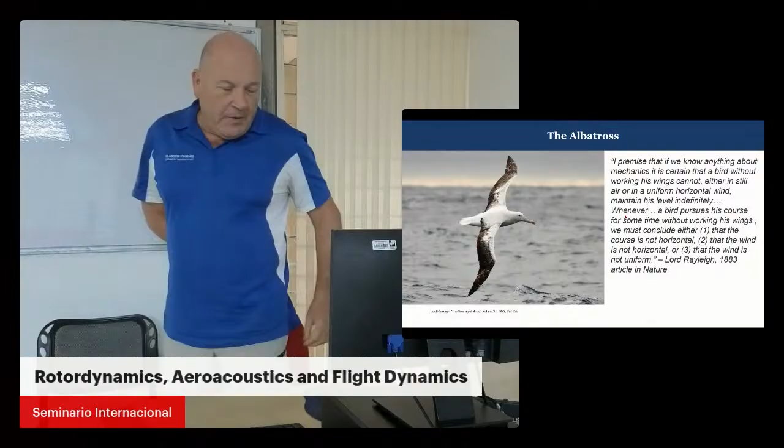Today is remote lectures. Now these will be repeating some of the stuff we talked about before, but going into some detail. I should say from the beginning that some projects faculty do, where they're very deeply involved, like very scientific, very physical, all kinds of things, usually those are the ones where we get grants, funding for those projects.

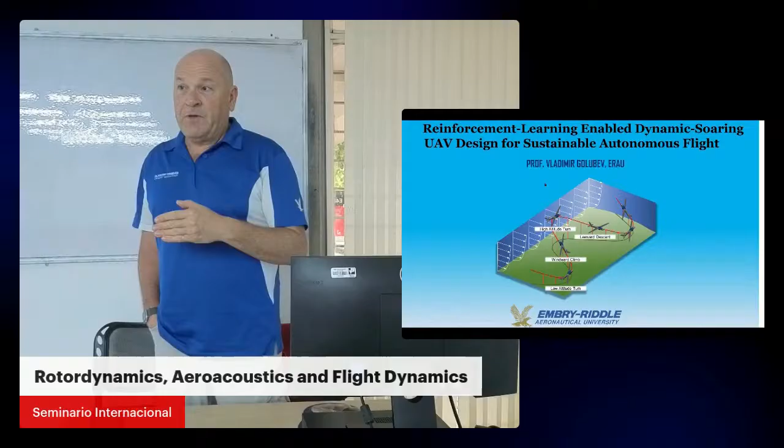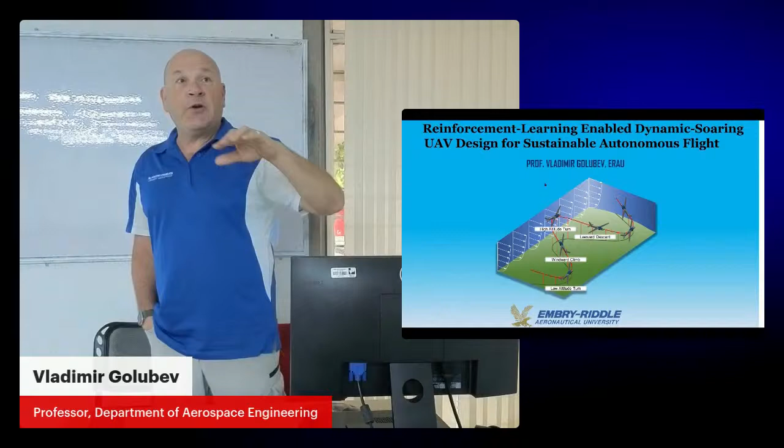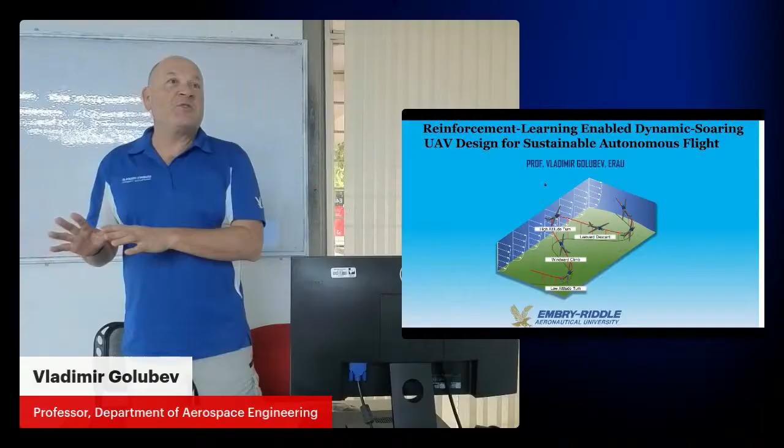And there are projects where we actually supervise student teams. So this project is actually where we have generations of student teams, so I don't know much details on every single thing. I'm just going to go through the background of this information because, as my understanding is from Dr. Guillermo, that's one of those projects where we can have some good collaboration. It's interesting because there were layers and layers. There were some master students who defended, but master students were supervising undergraduate teams, and we were getting return on grants for this, etc. So there was a lot of action for these projects, but they were doing it themselves.

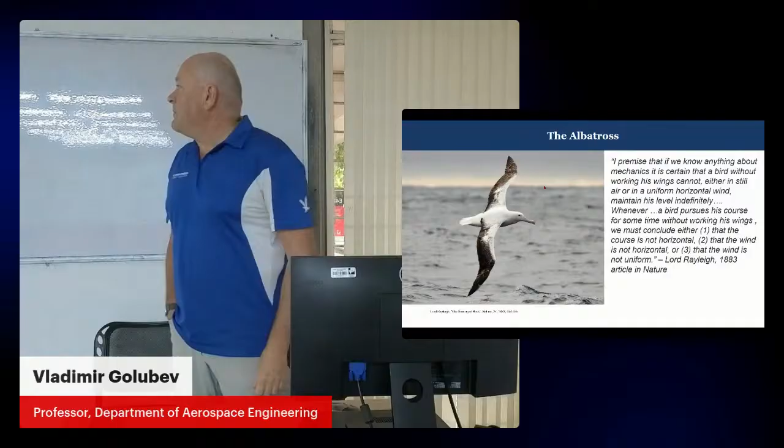Yesterday I talked about the albatross bird as the natural example of how we can fly without consuming much energy from food or anything else, because they do the maneuver where they can extract energy from the wind, from shear in the wind. And that's the case we're trying to replicate. But for this, you need to teach the aircraft how to fly properly and learn things. And that's where this artificial intelligence, in terms of machine learning, in terms of reinforcement learning, comes together.

Now, this is a citation from Lord Rayleigh, which I mentioned yesterday, from 1883, where he mentions the only way this bird can actually fly is probably in the course -- they can have the course if they're not flapping the wings, it's going to be the course is not horizontal, so they go down. The wind is not horizontal, the wind is not uniform, and that actually was the case. Of course it's not uniform, but he was making this clear.

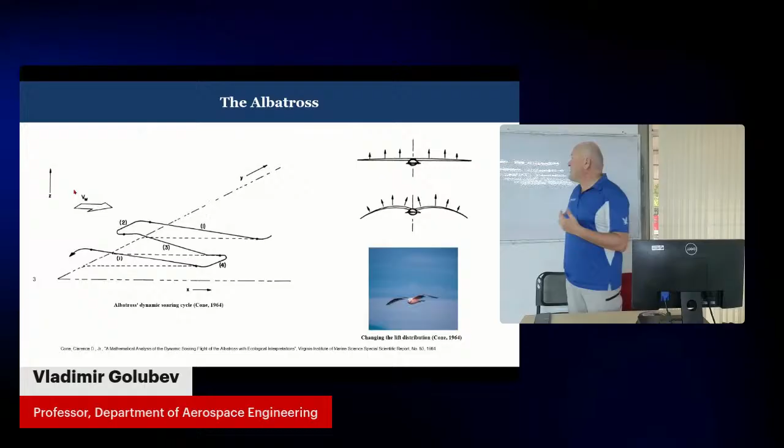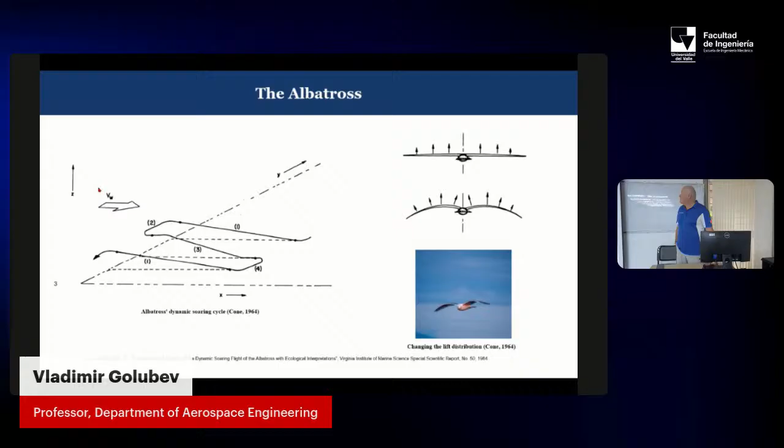Then there were papers later, much later, like 80 to 100 years later. In 1964, Clarence Cone, in his paper, came up with a more strict analysis of this whole process. He was talking about what happens with a bird when it flies, talking about the camber, which produces a dihedral, a variable dihedral thing which has to be there. And at the same time, he was talking about the trajectory -- how they fly to the wind and with the wind. That's what we call dynamic soaring flight, and that was actually when the science of this whole flight started to develop.

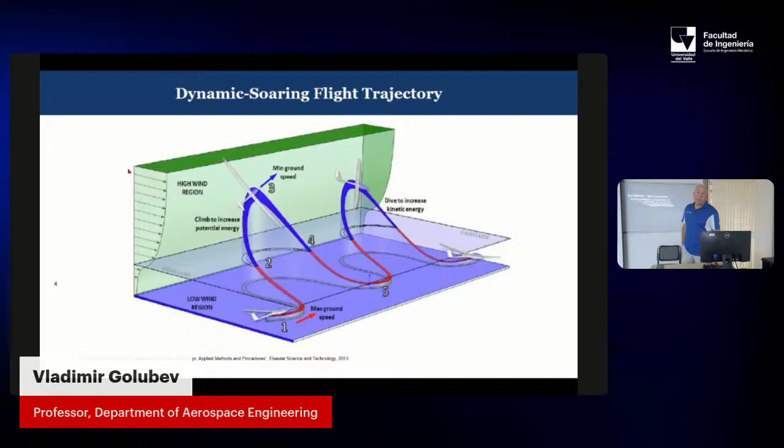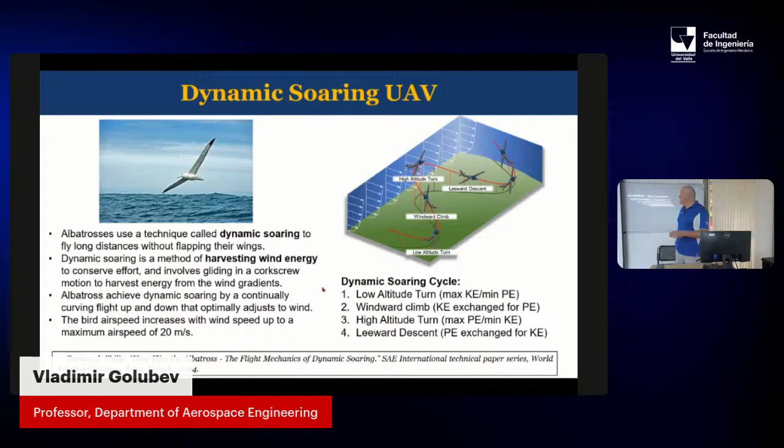And the project goal was, in this case, trying to teach the aircraft to do these kinds of things, so that it would be an autopilot, which will automatically adjust the flight responding to the wind conditions and everything. That was the idea.

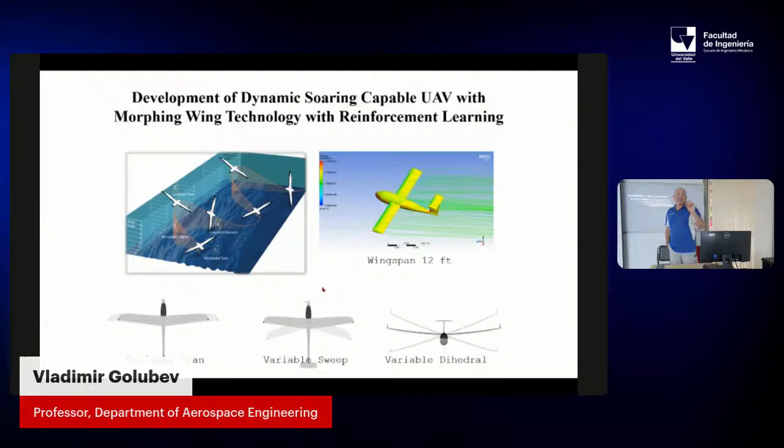But on top of that, there was an idea -- we were very enthusiastic about this project, and I wanted to have something new, so I was actually doing the variable span, variable sweep, variable dihedral for the flights. And the students took this task, but as I mentioned, everything here was done by master students, and there was no PhD involved, which would have been nice to have. And for a master student, they had one year, so they started, then 'okay, I have to graduate already, sorry, I cannot do this,' so that it gets split up bit by bit. So that was the history of this project.

And then, of course, they also provide student, like undergraduate teams. Well, the undergraduate teams actually, it's another thing -- they have the same experience probably because they really have to find time, since they take like 6 courses each semester, 18 hours sometimes. You barely find any time for any kind of research. And they meet -- some people come, some people don't, so that's a mess. Yeah, I mean that's not how business works, right? But that's what it is.

Anyway, so the first generation of student teams, that was Wes and Joseph. My former intern actually came from India, and then he applied to become a bachelor's degree student and work with me.

Well, a very bright student. In fact, right now he's at Boeing, became like a really famous guy there because he proposed some ideas how to use AI to measure velocity of the aircraft, not by pitot tube, but by sound.

You can actually hear the sound and determine what speed you are flying. In fact, you can do it in your car. That's how he actually started—he was putting the microphone next to the car when he was driving, and depending on the sound of the flow around, he could determine the speed.

So he proposed this idea to Boeing, and they were just wow. He got some award or something. He was almost nominated for best engineer by AIAA because that is a bright idea.

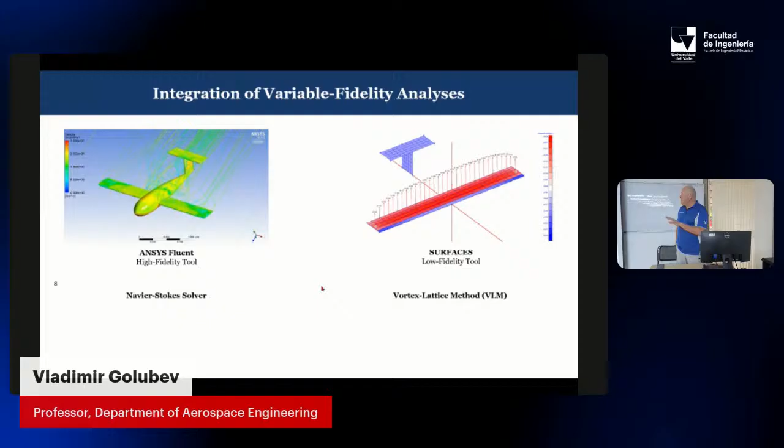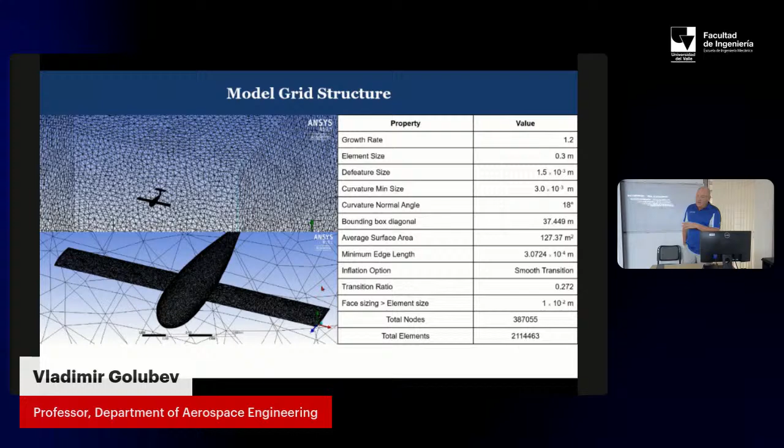So this is his conditions for the grid, which he was setting up. This is the aircraft, how it looks, the one he was developing for dynamic soaring. He was putting this into a SURFACES model with panels, setting all the conditions there. There are high and low fidelity models, and he was comparing them.

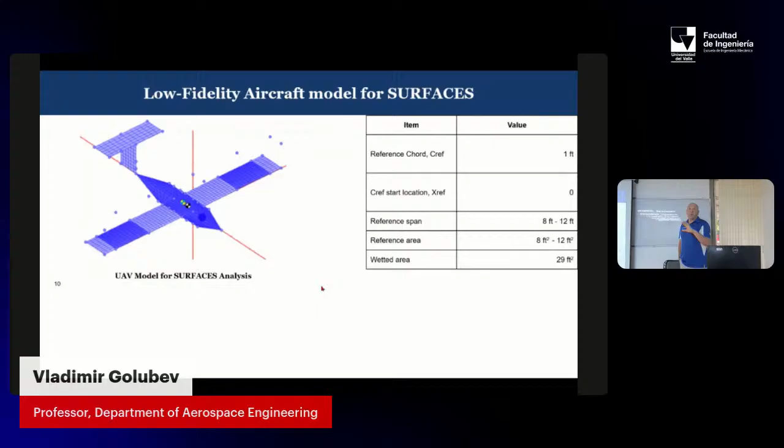Again, the low fidelity model works fine at low angle of attack, but at high angle of attack the low fidelity models don't work—you have to go to RANS, something like that. The predictions show the lift and moment coefficients. This shows how he established this whole thing.

Later, Jacob Adams, my other student, continued on the same line. At this stage, you can see all these coefficients, like CL versus alpha, like CM—this is just an example.

He also experimented with different turbulence models, which is important because you need to understand which one you can trust. There's some experimental results obtained from studies published by NASA—experimental 2D data, experimental 3D data—and then different models like Spalart-Allmaras, DES, and so on. He put all this together and compared which model was best, and that was the one he used later for the system.

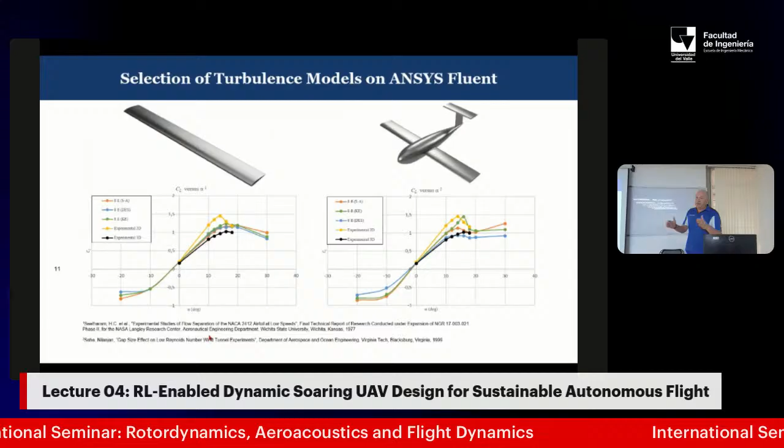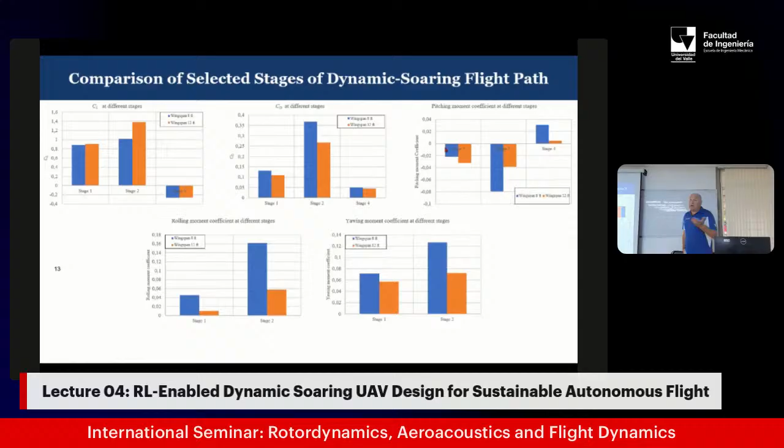That's what the experts do, but they do it differently. They do kind of contract the wings in some particular cases when they maneuver, so they do employ this thing. Everything comes from nature - that's another thing which we can implement.

So these are examples at 8 and 12 feet, flow separation on stage 2, for instance, one of the stages of flight. He was experimenting with which one. You see the wingspan at 12, for instance, shows much better scale compared to wingspan 8, because this one shows a lot of separation.

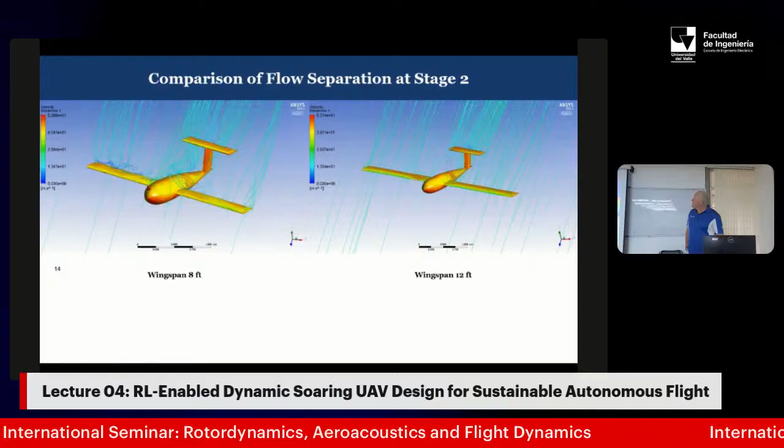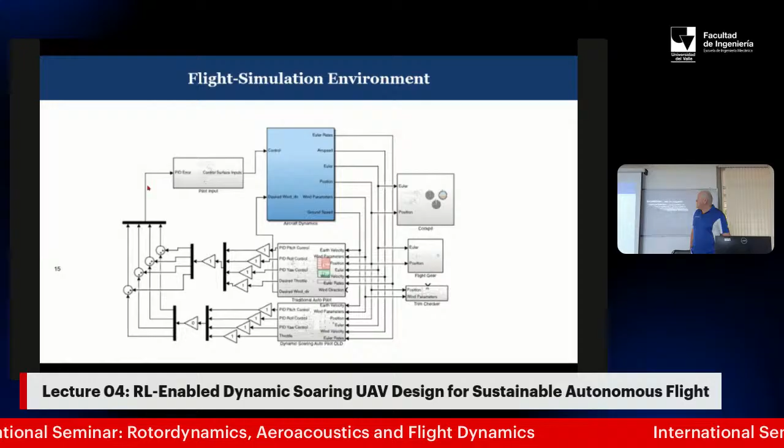Because of the stages of flight, from there he started to develop this whole environment. This environment involves a lot of elements which come together in a flight simulator - you probably use a lot like MATLAB Simulink. So that's actually part of the MATLAB Simulink stuff, putting all together with the autopilot controls.

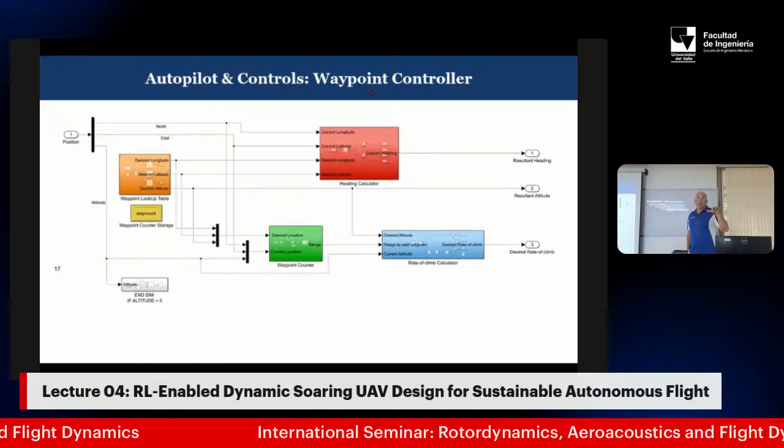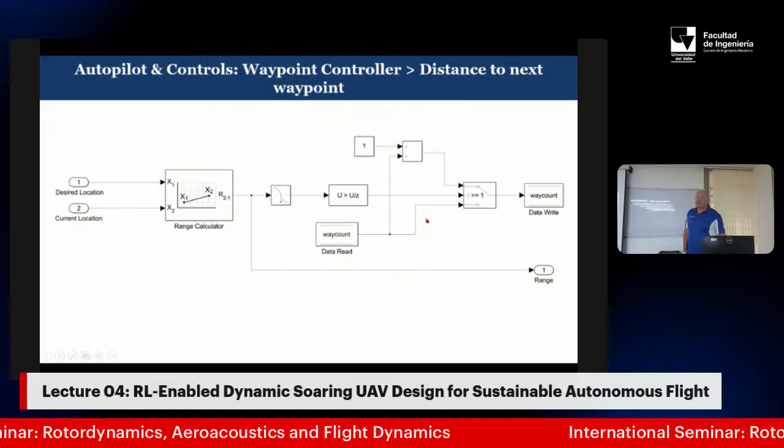You can see here with the waypoint control, you need to go to the position where you fly, and with that condition you actually have to try to reach it. So there's waypoint directions embedded into this system, and then you calculate the distance for the next waypoint - that's how you get location, current location, range calculator - all the elements come together inside this system.

And then you employ the wind model, which is synthesized but coming from the standard model for the atmosphere - I think it's the MIL-F-8785C standard model for wind shear. They had that, and that's what we use.

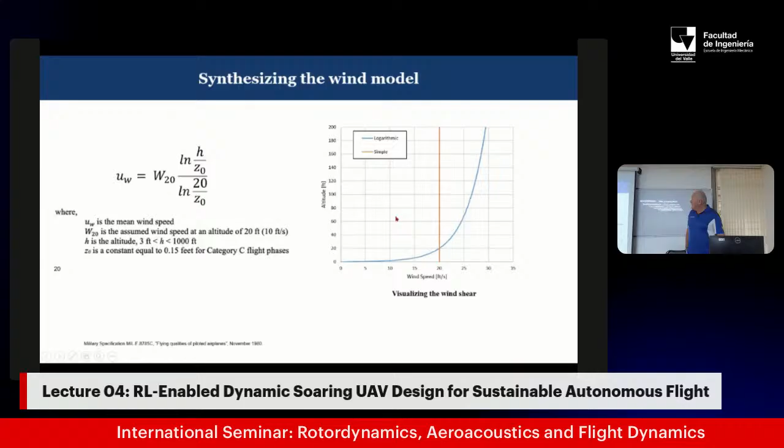This is actually one we see there - mean wind velocity at some altitudes and so on. So basically you use this kind of profile which you can put together, and then the autopilot controls and the control loops involved, like deviations, errors and corrections.

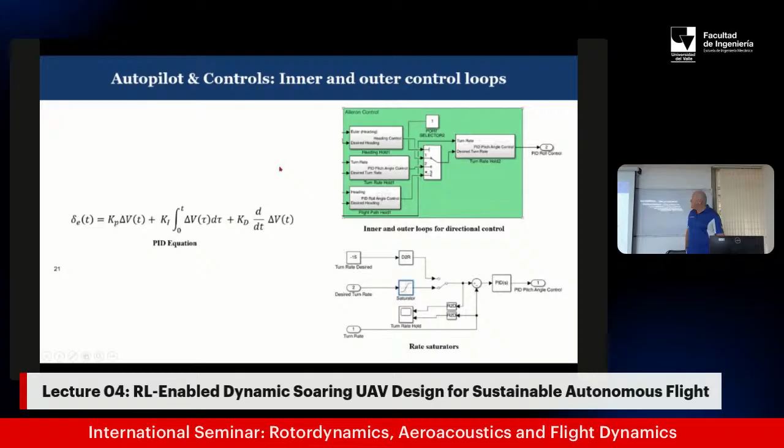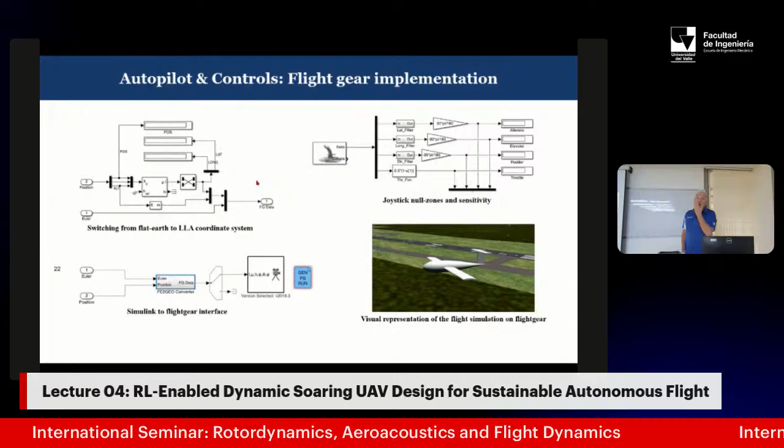As I mentioned before, there's actually an advantage we have in that we have a lot of design courses, so students are really, really good at putting everything together. Simulating is basically their second nature - they all know it. You probably use it as well, but they have a lot of stuff for which I don't know much, which is fun too.

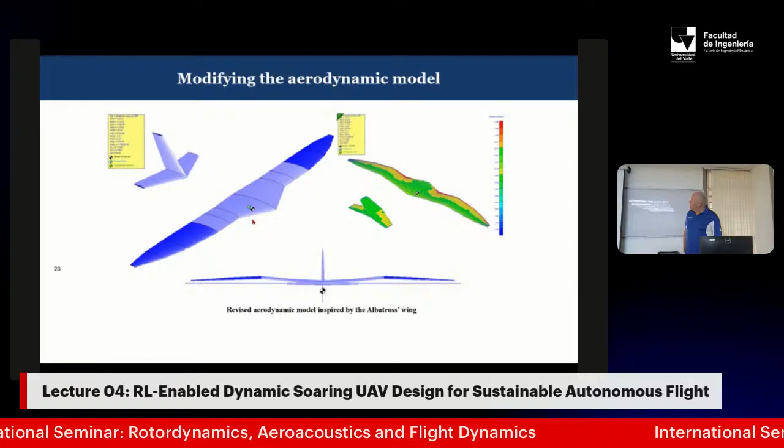But anyway, we found out that he was doing some modifications - see how that kind of wing becomes more bird-like, not just straight, there's some variables that we do.

And then he was flying this thing and seeing how it evolved with the different speed variants for 30 feet per second at different wind speeds, and seeing how it behaves. So there's actually manual pilot involved, and eventually he was looking at the total energy - how much he consumed, how much he can sustain.

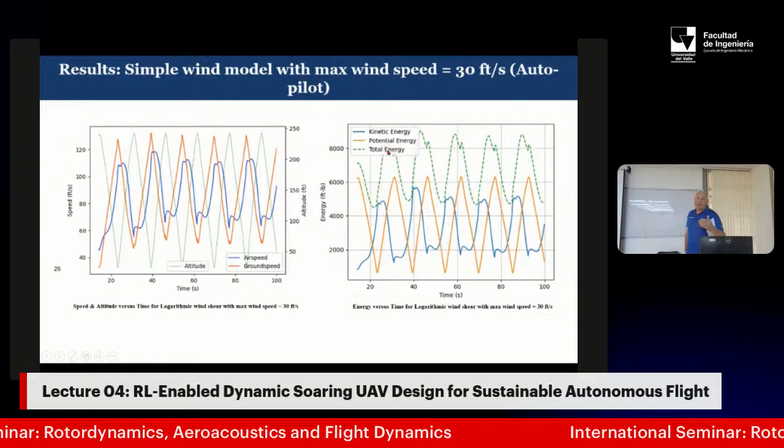Pretty much everything that Jacob Plater did in the automated system, with reinforcement - but he was basically doing this all by himself with the manual pilot.

First we started with soaring, so it was implemented - all this thing, see all these things here. It's a human piloted dynamic soaring.

That's the point - the legacy of all this work went later to Jack, that's my second student, with his team.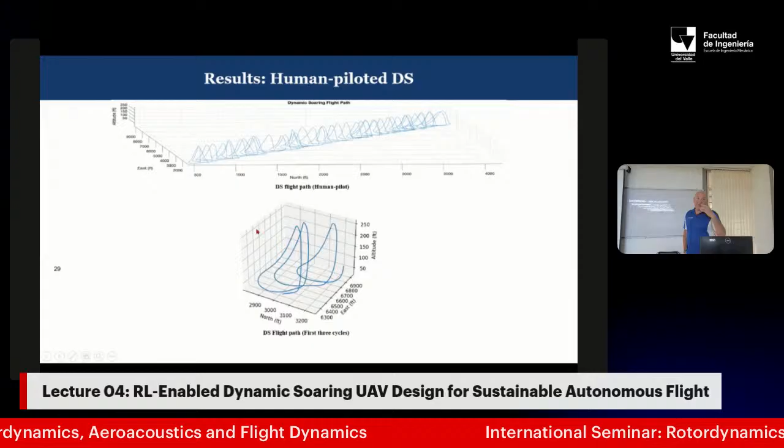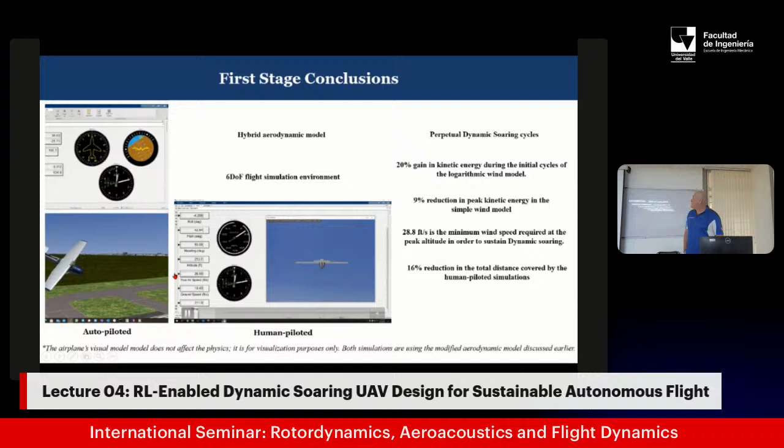That's how you pilot - you can do it. That's the things. It was a lot of fun for me, human pilot.

And then came Jacob - after actually it was some intersection, like a few weeks, because I needed to provide continuity. So all the legs of the work she gave to Jacob, who was head of the other team of undergraduate students, and with that team we did the work, as I mentioned, my project, my work from the university to develop, build and fly.

So the idea was to use reinforcement learning to provide the flight path, which was manually piloted before, for dynamic soaring under given wind shear conditions. There will be inputs coming from the shear condition, wind directions and everything else, and then you would be flying automatically using this network-based system. There will be offline training, and then online training as well to make it more precise, because we cannot teach everything offline.

So several stages, and I think the only thing implemented so far is offline, so we're able to do it on the computer. If we continue this project, they will have to implement another stage of the redesign of the system.

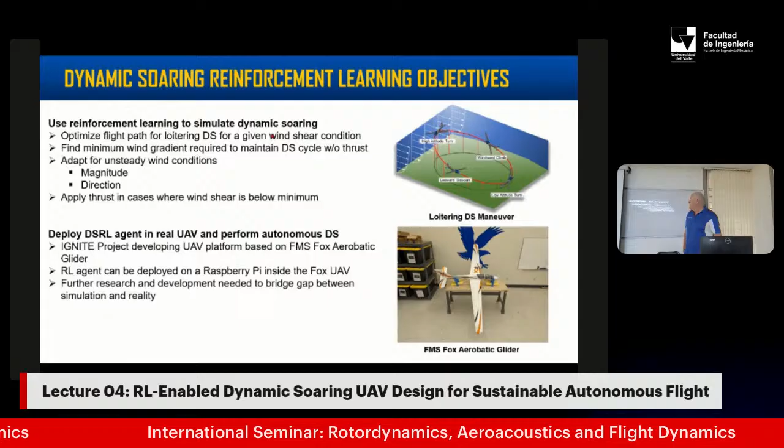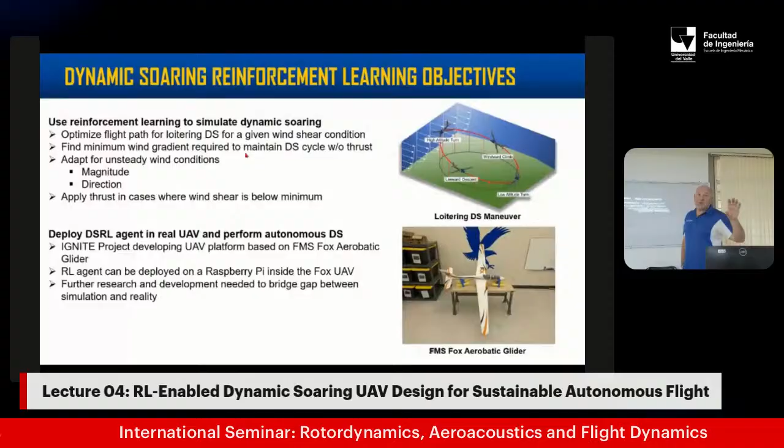This project is, of course, a nice PhD project. This PhD project is actually taken from a number of small projects sometimes. For instance, we have students supervising masters, and whatever master's project is going on is incorporated into this big PhD. That's how the system works.

So this is the idea: to develop this reinforcement learning, eventually deployed on a Raspberry Pi. That's part of the system inside the Fox. And with further research, to see how to bridge the gap between simulation and reality, which requires some online training as well.

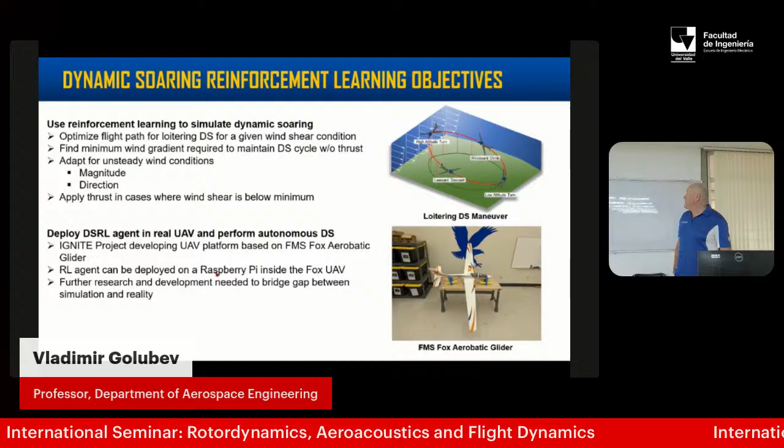This part I talked about yesterday relates to the interaction between the actor and the critic. We have some mentions of this policy implementation, deterministic, stochastic, using the neural network. Eventually, they chose the path of deep deterministic policy gradient, DDPG, which was used.

Environment is the world outside, with state, action, controls, and reward. That's what the critic tells - whether it's good or bad. There should be some judgment there. Observation defines current states, whether it's good, etc.

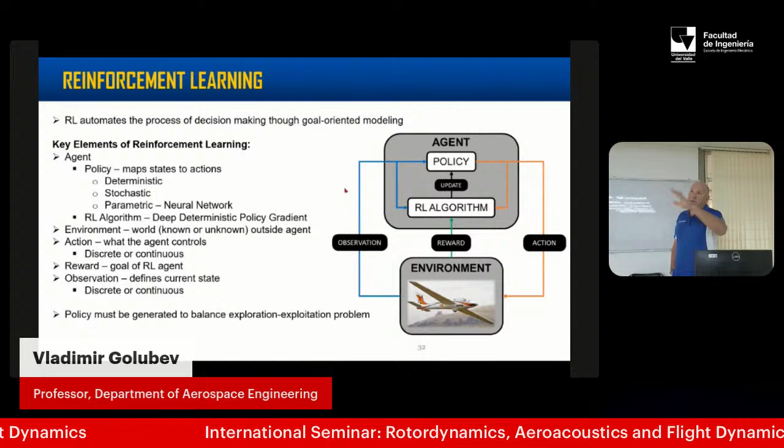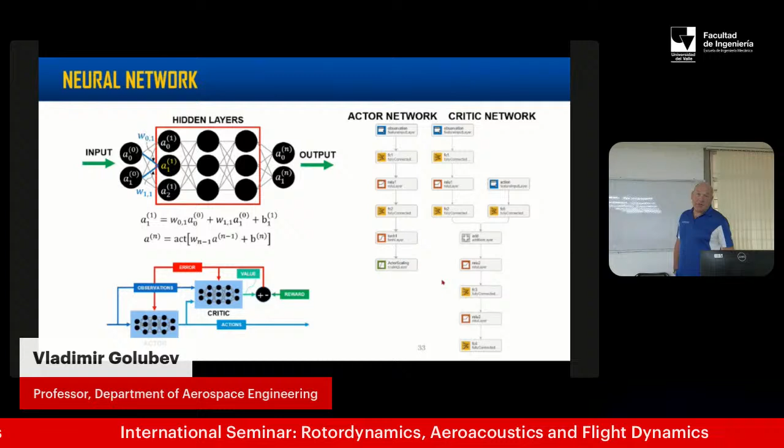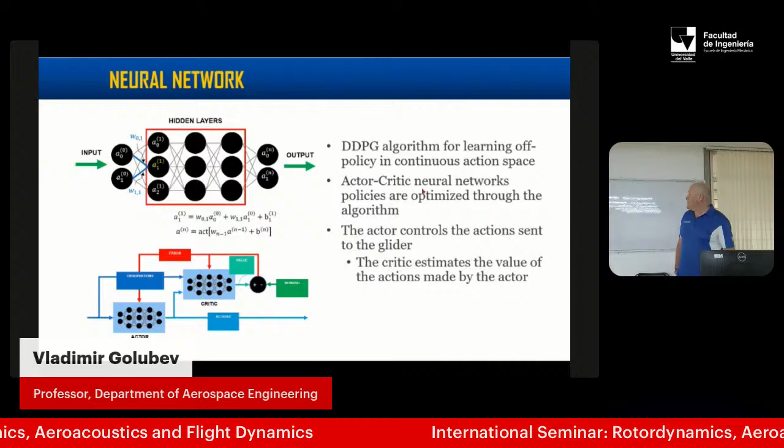You can see here this is the actor network, the neural layers, and this is the actor network and critic network with lots of components put together, giving you the simulated environment. Basically what they do is implement the controlling of actions, and give reward for good actions, or penalty for bad actions.

So DDPG, some details here. There were some experiments done because it's different, I suppose. The general policy gradient theory with some history was developed in 1999 - very recent, only about 20 years since they were doing this kind of thing. The theory was developed by Sutton, for instance.

It uses so-called greedy policies to select actions with the highest estimated value. That's this capitalist view, right - whatever is good versus bad, explicitly represented by a function approximator and so on.

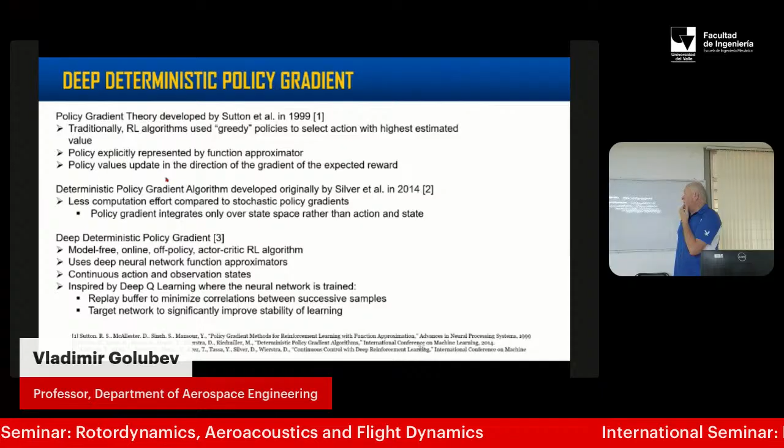Then there were elaborations on this specific theory - the deterministic policy gradient algorithm was developed by Silver in 2014, very recent. Well, it's only about 10 years, not even 10 - well yes, 10 years, 12 years, that this algorithm has been in development.

And it's less computational effort compared to stochastic policy, gradients only over state space rather than action and state. And then I don't even know when this guy developed it.

Let's hold it there - that's the latest, and that's what we use. It's a model-free, online, off-policy actor-critic reinforcement learning algorithm. It uses deep neural network function approximation, continuous action observation states, inspired by deep Q-learning.

So anyways, this is the one which was selected, I think based on some experiments - all these are implemented in the MATLAB Simulink. You can play with them and see which one gives you better output. But that's the one which, after several iterations of trial and error, Jacob decided would be the best.

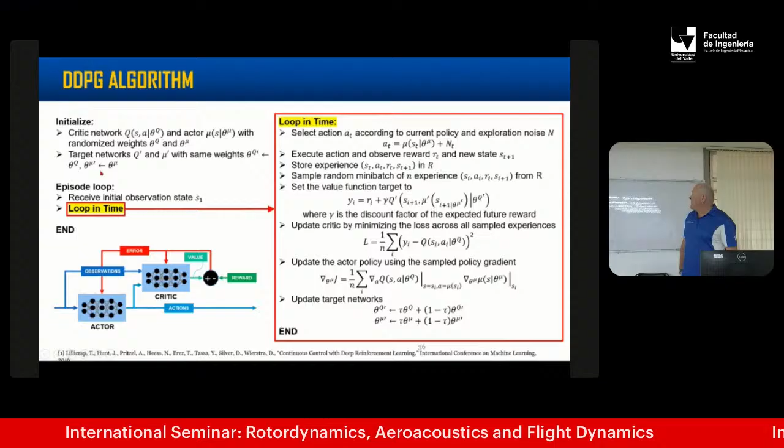All right, and now it goes into this DDPG algorithm implementation, which was basically implemented through episode loops and initialization. So there's a critic network, the actor with its own parametric assignments, the right amount of space, and so on - this is the mathematical formalism showing how it's done in terms of specific parameters included in the flight explanation.

And the episode loop - you receive the initial observation state, and then you loop in time. This is all part of what the DDPG does as part of this looping in time: select action and repeat actions for experience, sample a random batch of experiences, set the value function, update the critic by minimizing the loss, update the actor policy.

In a way, this shows how learning is done and how it's actually rewarded, but it's all split into a number of very clear steps. So this is how it's all done - this system of actor-critic implementation for each particular episode loop. Let me show this, and there's a training process - it's part of this.

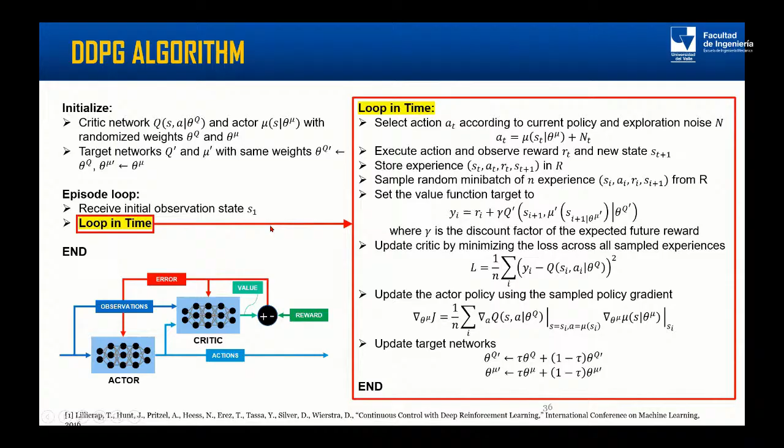That's how it's done. This has been implemented in this particular paper, presented at a Conference on Machine Learning in 2016. So that's actually celebrating 10 years of this algorithm, and how it's actually done. Very recent - that was all implemented in the autopilot system.

The objective was to develop this, and then it should be updated again with the aerodynamic predictions, for this particular glider. So now we have a specific aircraft for which we're designing the autopilot system, so we can actually fly it well. All the coefficients we calculated were based on specific parameters of this particular glider, including the mass, inertia, and everything else.

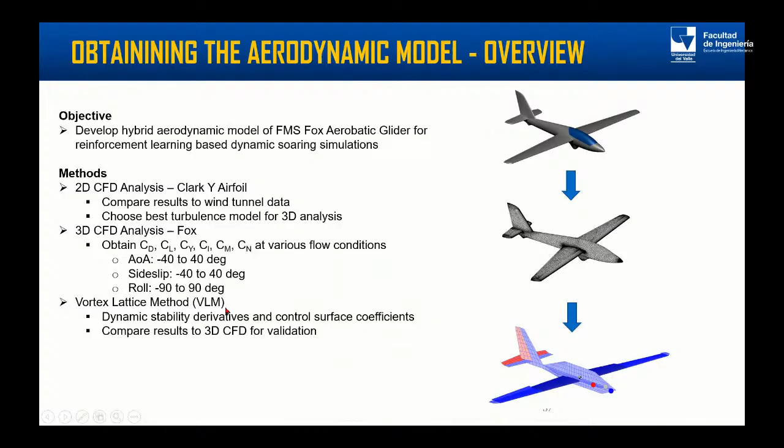So then this Vortex Lattice method was chosen for fast calculations for the medium range of angles, because the panel method - this panel method - combined with this, since it's expensive to run for every possible case. So that was a combination of things.

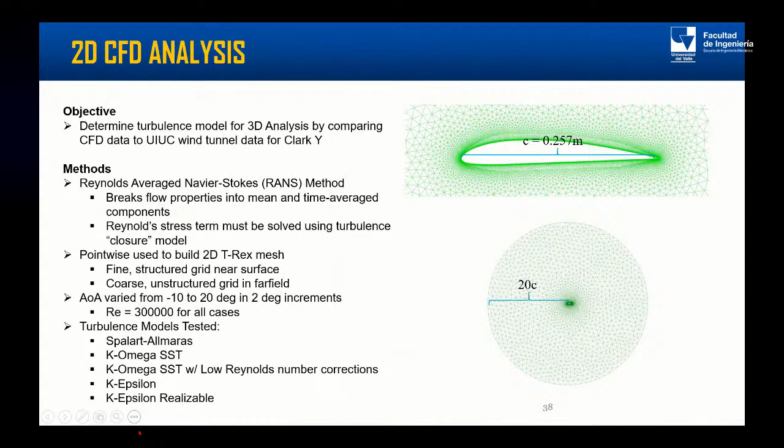Turbulence models were selected as usual, and then RANS, Reynolds-Averaged Navier-Stokes, which is what you always run. Point-wise mesh generation, angle of attack simulations - turbulence models were also selected, and there's a lot of analysis here to see which one best predicts the experiment, with SA and k-omega SST among those.

So for the 3D CFD analysis - that was actually 2D - the CFD analysis was done on the actual aircraft, not just the particular profile. As I mentioned, RANS was run for a Reynolds number of 300,000, specific to the aircraft geometry for this particular thing.

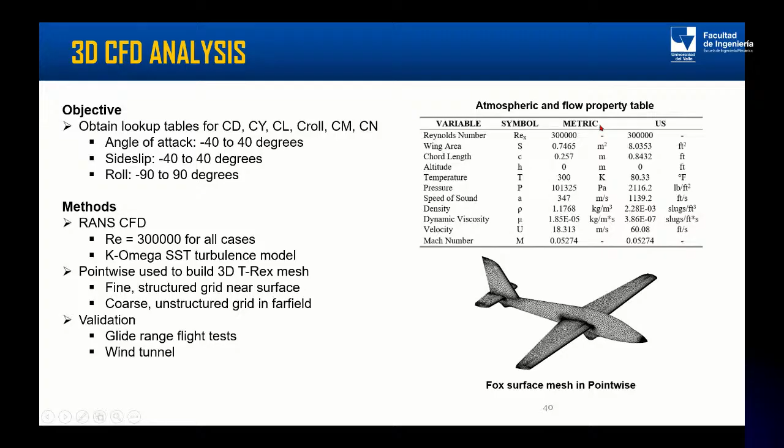Parameters I mentioned here - atmospheric and flow properties - were included in these simulations. Point-wise was used, and mesh generation was done - that's how it looks. You have a small box with very fine mesh surrounding the aircraft itself, then a far field mesh propagated some distance away with some flow conditions. You can see this clustering of grid near the aircraft, and all the parameters for this connection are right there.

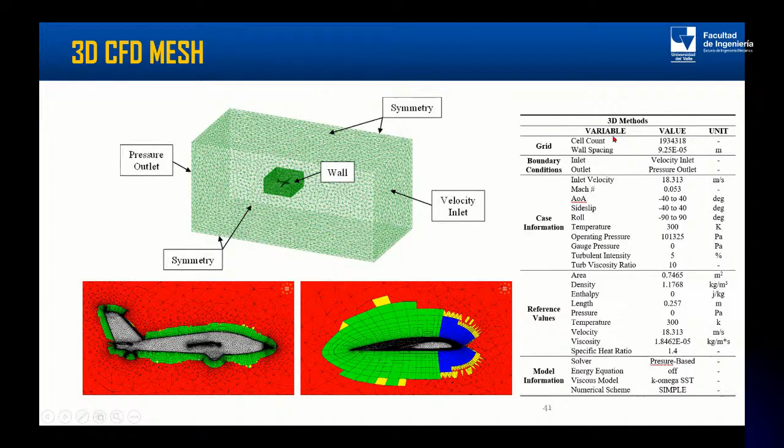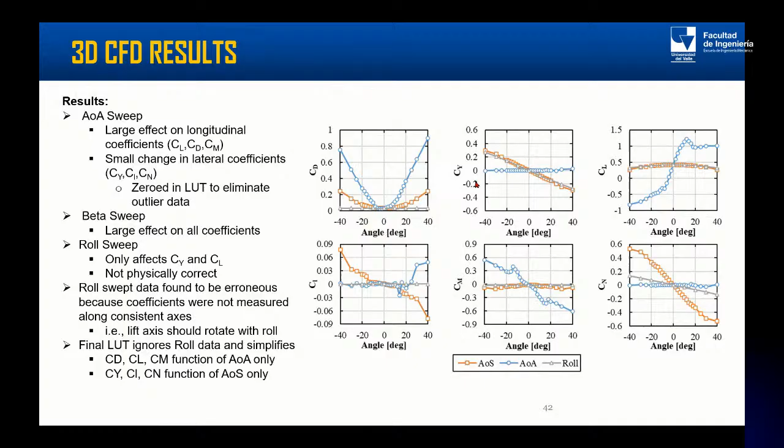We hope that the 2D predictions, which validate the experiment, would pretty much validate these 3D results as well. But we don't know - there's no comparison with experiment yet. It will be like during the test, we will know if it actually works or not. We'll fly it finally.

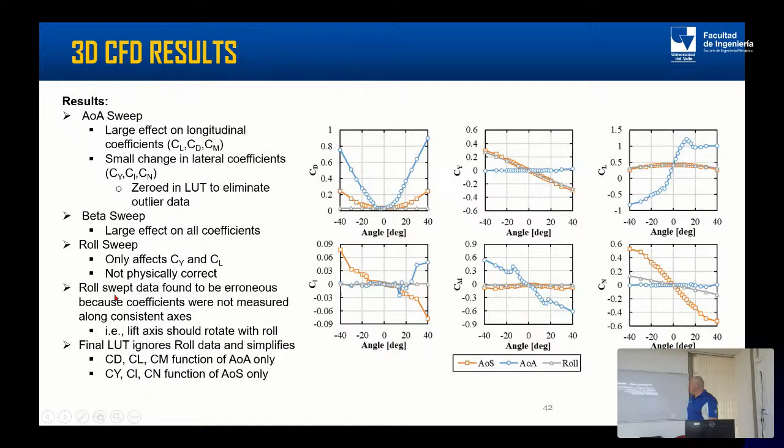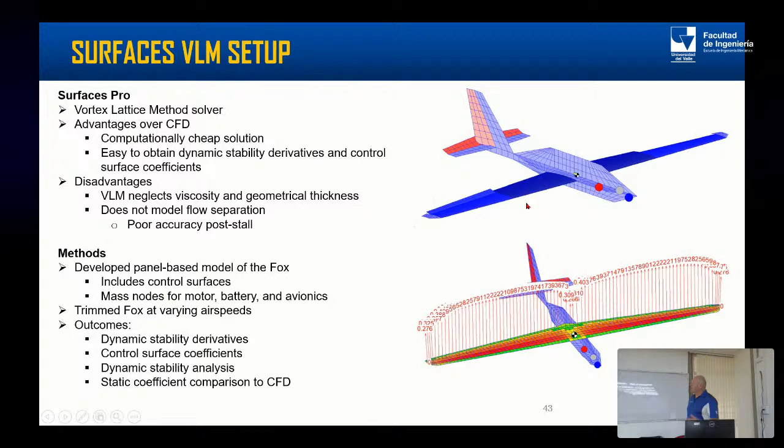This was actually used later to predict the derivatives because we need the dynamic derivatives. So that becomes a bit of an issue because you need to realize that whatever inaccuracy you have there, it will be carried with much more severity in the coefficients and the derivative.

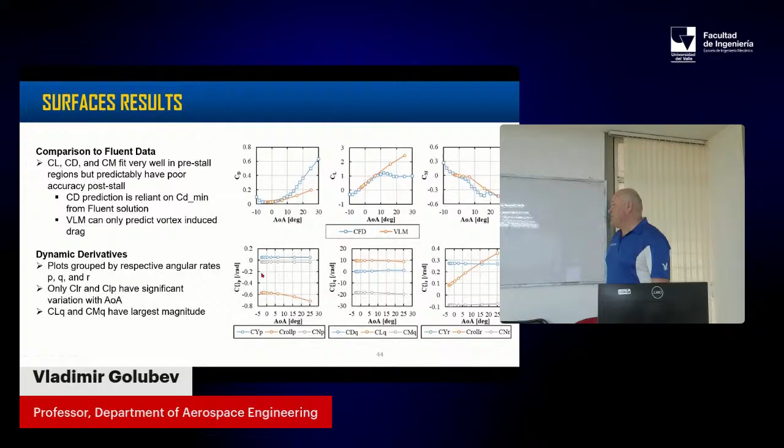So anyways, that's what we got. Right now, this is the data which we converted to an autopilot. How it's going to work, we don't know because we didn't fly it yet. So there's hope, but whenever we're going to fly finally, we'll see.

Dynamic stability analysis was done on longitudinal and lateral dynamic stability. We built this including for the limited range of angles which the control surfaces are going to form. Some results are shown here.

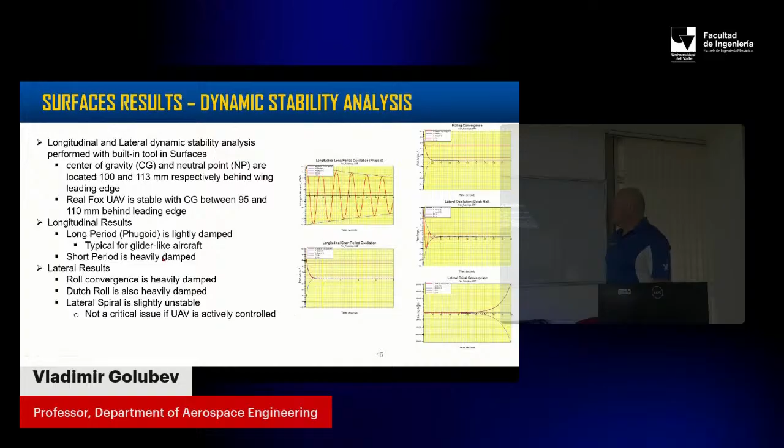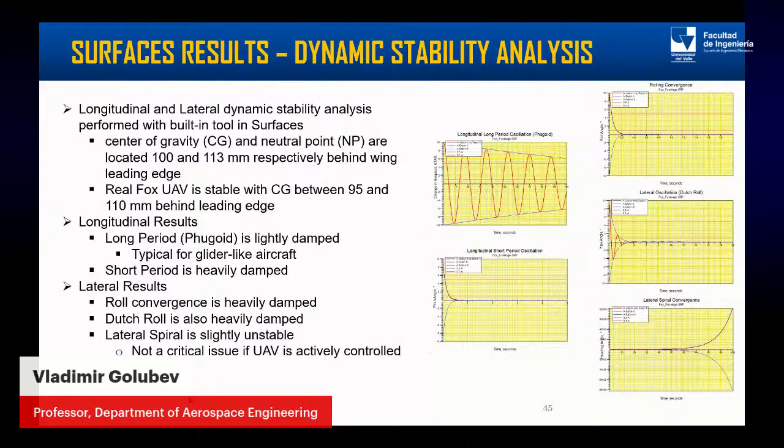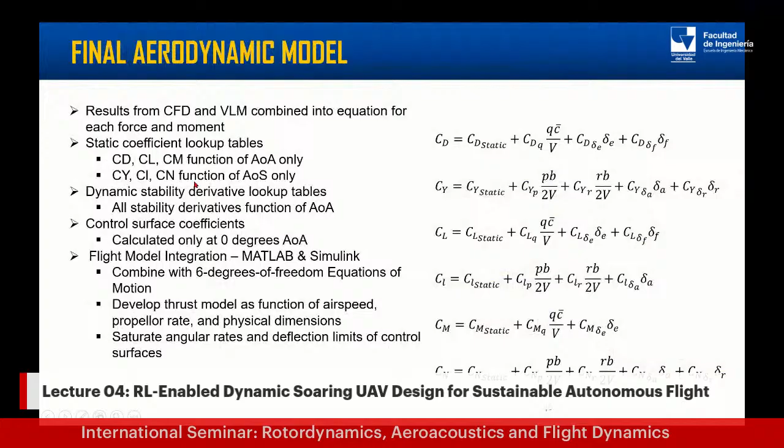So that's what also applies to the autopilots. All the stages are important.

Flight model integration is a MATLAB Simulink combined with 6 degree of freedom equations of motion, developed thrust model as a function of airspeed, propeller rate, physical dimensions, control surface angle rates, and deflection limits of control surfaces. So, see all the steps.

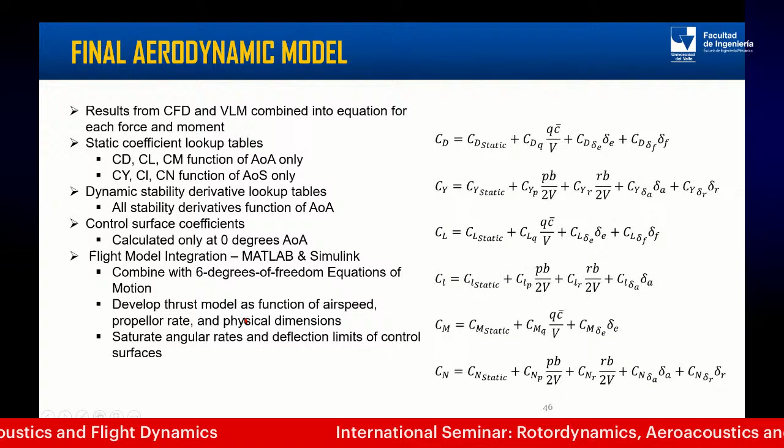Used the same methodology, made it familiar. So eventually you build the same kind of model which was done previously by Jacob, but in a more sophisticated way because now it operates with built-in reinforcement learning tools as well, training model. This is implemented now for a specific aircraft.

This allowed for development of dynamics and maneuvers for the vehicle. The components include all these lookup tables, wind dynamics, total force and moment calculations, wind shear moment, propeller thrust model, joystick, built-in visualization, and reinforcement learning training.

So all these components are part of this big MATLAB Simulink environment. It can be tested, see how it works, and hopefully deployed almost as an autopilot.

The non-linear equations include the force equations for the aircraft velocity components, including the wind shear equations, which come from something that may be different in nature, so that may be updated online for more accurate predictions. So, kinematic equations for the angles, angle derivatives, rate equations, moment equations, navigation equations — eventually all these things are put together.

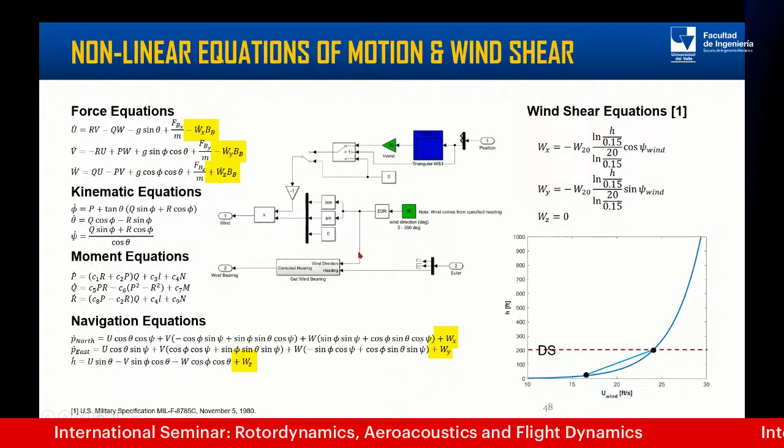The application was done looking at a single agent, a soaring energy single agent algorithm, where the agent controls UAV and optimizes the dynamic soaring maneuver. The agent is free to explore the environment and determine the most optimal dynamic soaring maneuver. The goal is not to crash and maintain total energy over time.

There's also a double agent methodology: agent A is the path optimizing agent, which optimizes the path for soaring rather than using previous UAV states. Agent B is the path following agent, which follows the path with the least thrust possible. The double agent approach is safer to deploy and yields really efficient paths. So these are the options for how you guide the route — single agent or double agent methodology.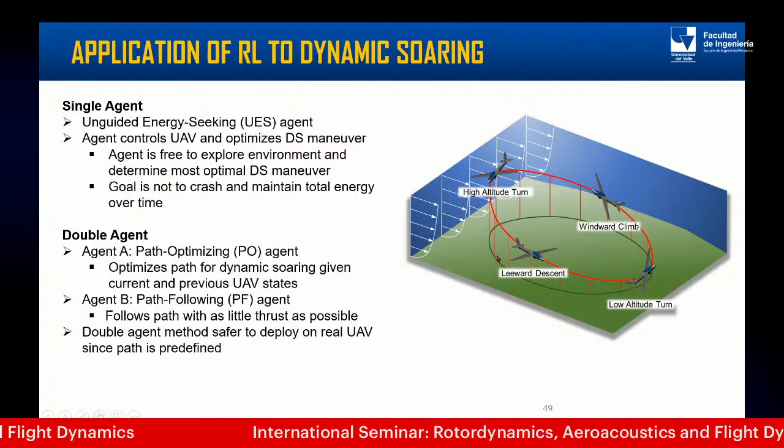The path following agent, agent B, uses a waypoint algorithm that calculates the error between the path and the vehicle. Training inputs include lookahead point, relative position, relative attitude, flight path, and so on, and the output is position error, angle error, and flight path error. That's how you determine how to minimize the error to stay on course.

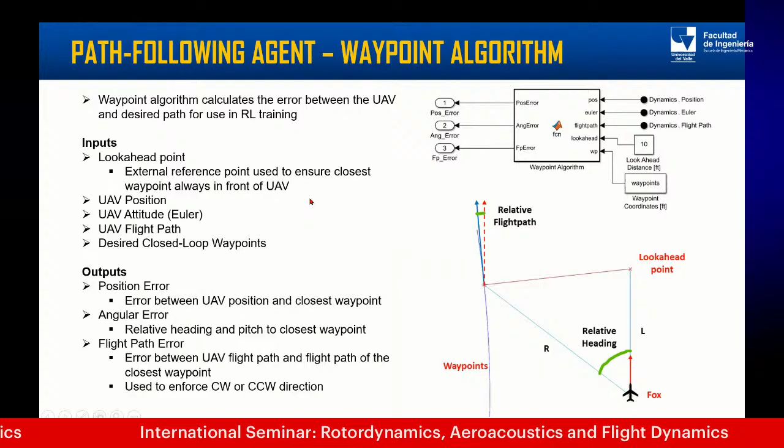There were several generations of these attempts for different configurations, like pitch and roll observation, reward function, angular error, and so on.

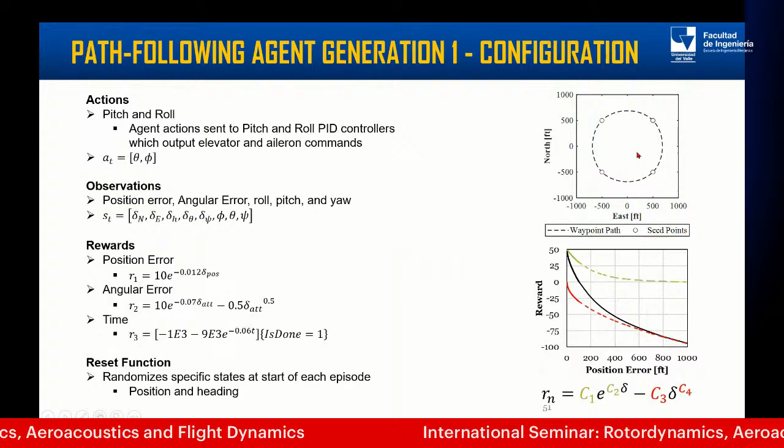In the second configuration, the neural network size was significantly reduced, speeding up time to the optimal policy. The mini batch of randomly sampled experience was significantly increased. There's a lot of tweaking around with this reinforcement learning algorithm to try to get it performing as well as possible to follow the desired trajectory. With the mini batch increase, you get more stability, so the actions are similar to generation one, plus additional observations.

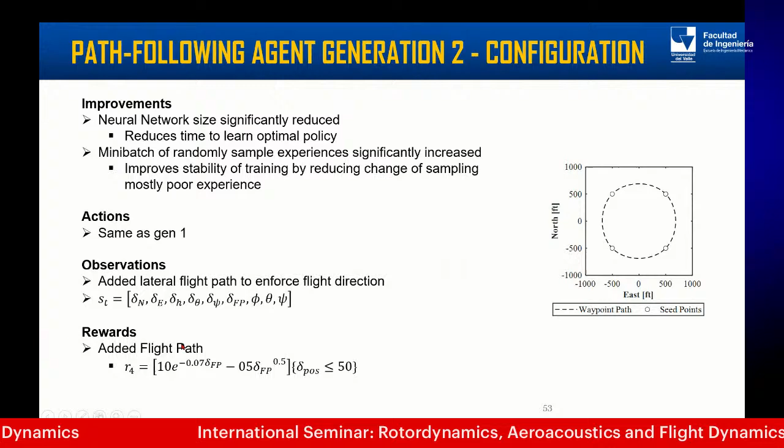Added lateral flight paths to enforce flight direction. Rewards added flight paths, so there were some manipulations in the rewards. But eventually, again, you want to follow the slide, and it sticks to it now very well.

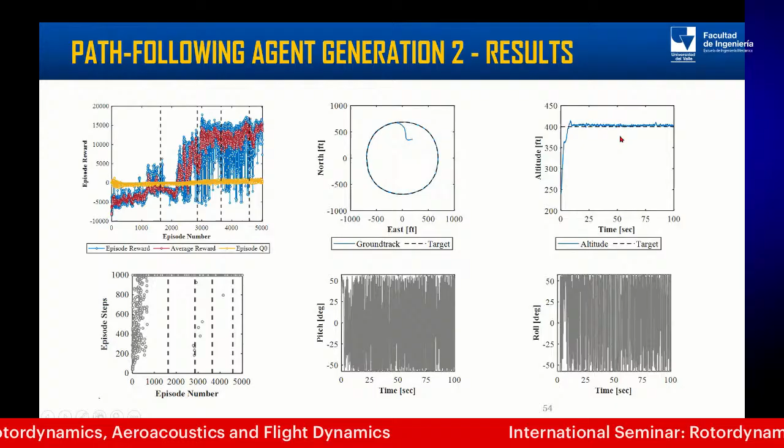So that was actually much more successful. With all this tweaking of the algorithm, he was able to get it much closer. And look at that, for the altitude also, it follows much better now. It's not all over the place.

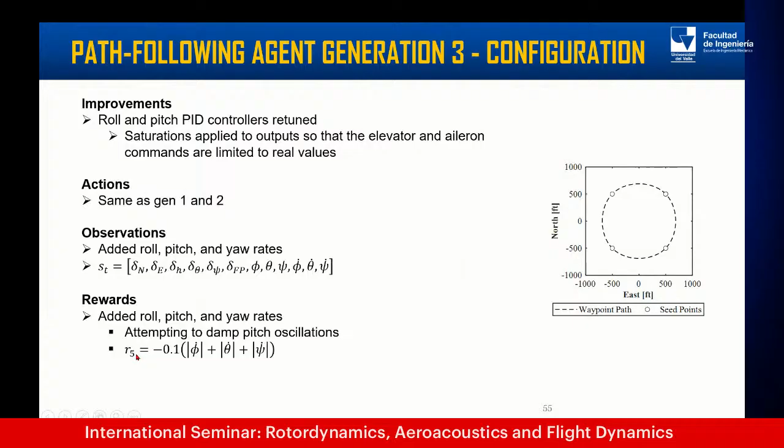So that was the second configuration. Configuration 3 of the path following agent, with some improvements for the roll and pitch PID controller tuned, saturations applied to outputs of the elevator and so on. There was a lot of experimentation - it's a fun project, you can do a lot of things. And then observations and rewards, just getting better and better.

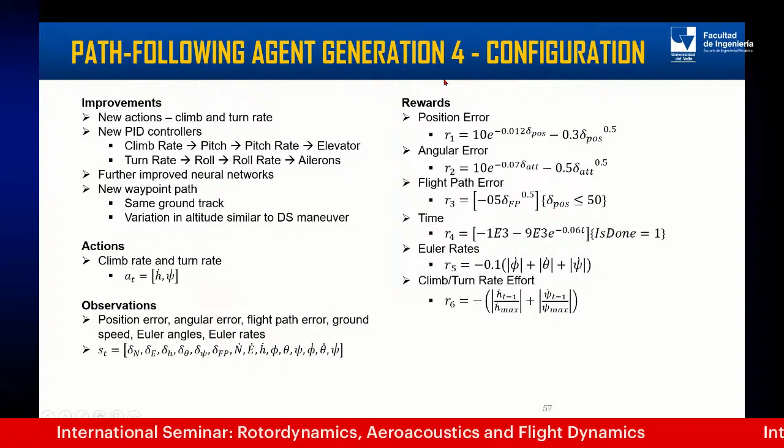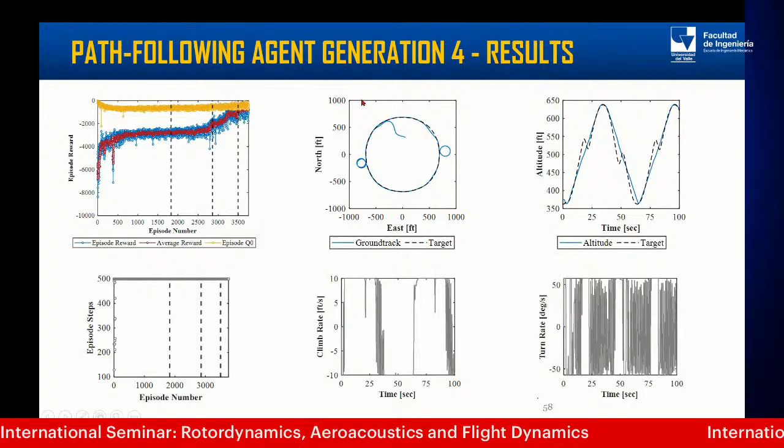The final configuration 4 was with specific reward functions and action directions. So actually, this is the case you could follow up, which could change, not just the same - it's actually changing, so the path is very accurate now, with this latest generation of attempts to retune the algorithm.

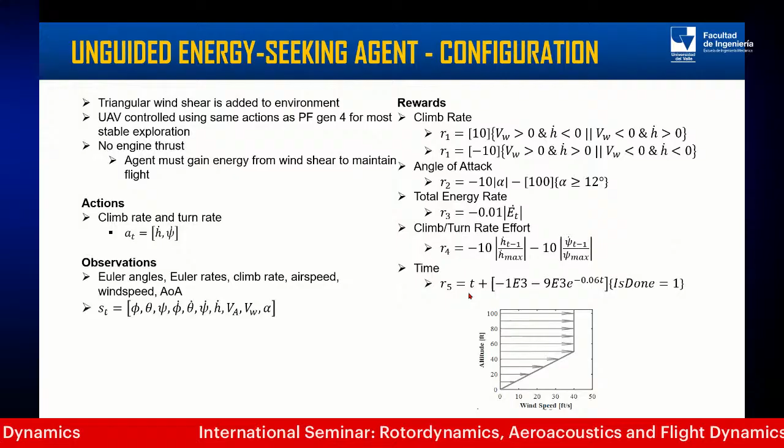Okay, and that was the winner in the end for his forward attempt. And for the trial and error attempts, he was finally able to get something which would follow not just the altitude, but the path, and at least retain the energy rate - the energy was still losing, but the energy rate was pretty much constant.

That's the red line - this one was still going down, and this still going down, so altitude was still being lost for this maneuver, but there was a hole, and that's when there was a... and that's when he left. That was the end of his thesis.

It didn't really quite succeed, but he was close when he attempted trial and error. And then there was a...

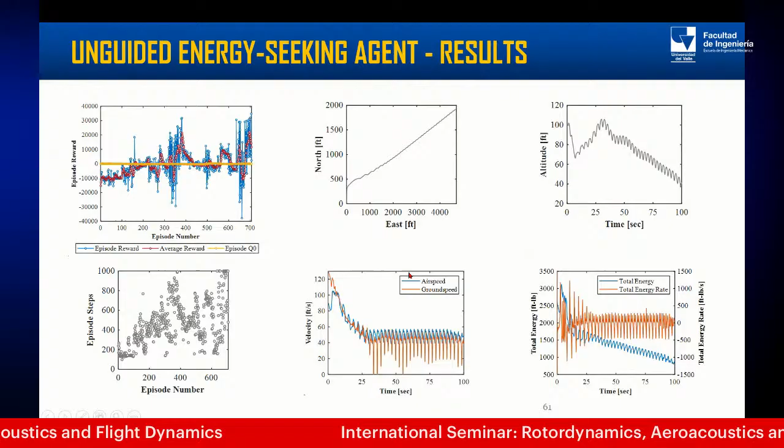I don't know, now he's going back to PhD status there. Very smart guy, really. And eventually, as I mentioned, he was playing around with reward functions, so his focus was to see if the reward functions would make this thing work, and finally it worked.

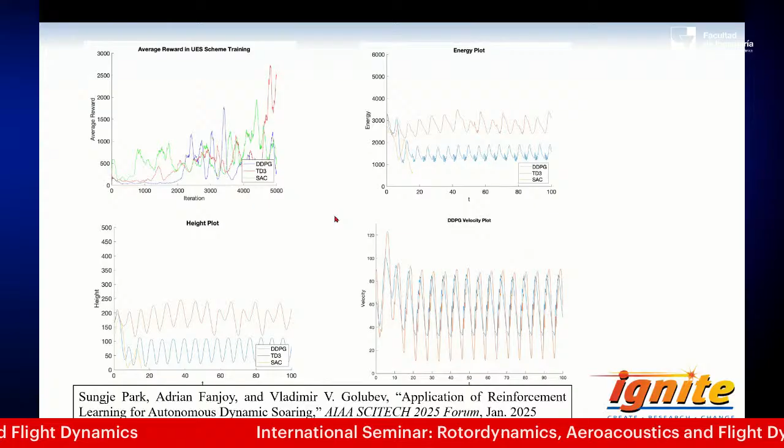So that's where he succeeded, maintaining the same energy more or less, the same altitude, some variations of course, but still - so that's where we stand. So whoever is brave enough to pick it up from now, that's the stage we're at. And again, the glider is waiting - we gotta put it all together, it's sitting right there in storage, waiting for everything.

So that's the overall conclusions. A variable fidelity hybrid aerodynamic model was generated for this Fox Aerobatic Glider. A 6 degree of freedom simulation environment was developed, and reinforcement learning was performed to assess different methods for dynamic soaring and gliding.

The future work is basically to finish the job - flight, yes, that's the idea. That's, I hope, the area of liberation for somebody who wants to go. But a lot of things were done, a lot of stuff is done. I have a lot of materials, papers, and the actual model is there, so you can play with it.

And we got the money to assemble the entire autopilot system. So different components, the computer was the biggest thing, and everything else was there. So it's all working with flight, which is...

The latest guy who actually did the work was my Stanley PhD student, but he is focusing on a NASA project, and now he got this Smart DoD award - it's a special fellowship for really smart guys in the US. So he is now fully supported, he doesn't require any kind of grants or anything, he has full support for everything.

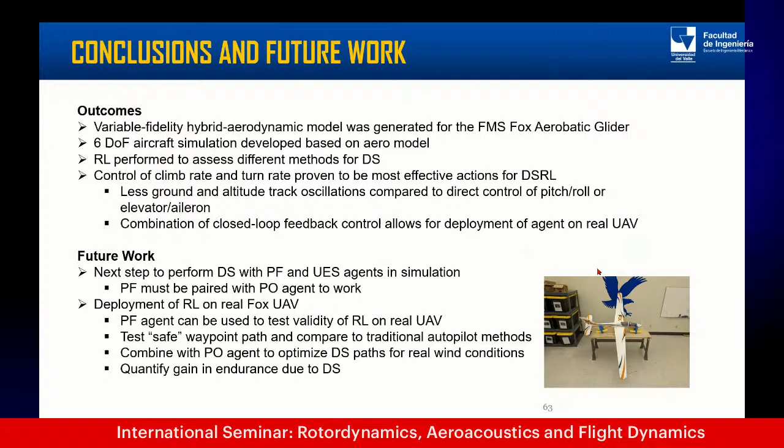It's very large. He is right here, standing—see, standing. It's the guy on top, right.

Anyways, any questions? Sure. Thank you—to be honest, I don't know much, but I can tell you from the beginning. If you ask me about some specific details, I could say talk to Stan.

In what situations? For instance, right now, what Glasson was doing with the speed determination is complementary. You already have the aircraft with pitot tubes, but if something happens and nobody knows what to do—in many cases that happens, the aircraft loses its ability to gauge velocity or other things, and that was a disaster, the aircraft was destroyed. But this one thing is actually working on the side, a reinforcement learning based system to determine the speed by sound. So that's complementary in this case.